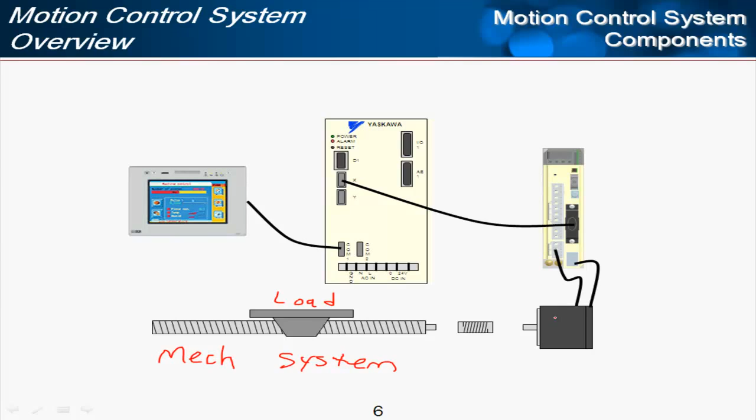So first, let's look at the components of a motion control system. The most important component in many aspects is the load, which could be a ball screw, a belt, or any type of mechanical system. But the load can't move by itself. We have to have a motor, a servo motor in many cases. But the servo motor also can't move by itself. It has to be driven through a drive.

This servo drive is often referred to as the amplifier, or amp. Yaskawa has a name that we put on the front of ours called servo pack. So these terms are all synonymous in the motion world. You'll often hear the word servo, and it can refer to the motor and drive, sometimes together, sometimes separate.

One common mistake is to call this drive the controller. In a sense it is controlling the motor, but the controller, or the logical controller, the PLC, is a separate system. The drive just takes a command and makes the motor move as commanded. The controller is what makes the decisions and decides what that command should be.

Over the years, different manufacturers have done things to combine the controller and drive into one package, or to combine the drive and motor into one package. Yaskawa has done this with the MP2600 IEC, which puts the controller together in one package with the drive. But really, no matter how you look at it, we still have these distinct components, whether they're in the same package or not.

Finally, here's the user interface, the HMI, the human machine interface. That could be a nice panel like this, or it could simply be switches and indicator lamps. This HMI is used to access and perhaps change different parameters in the controller, so that the controller can change the way it commands motion to the drive and hence to the load.

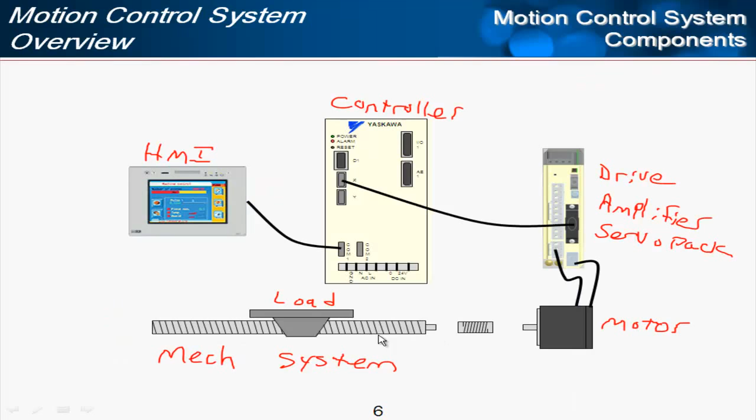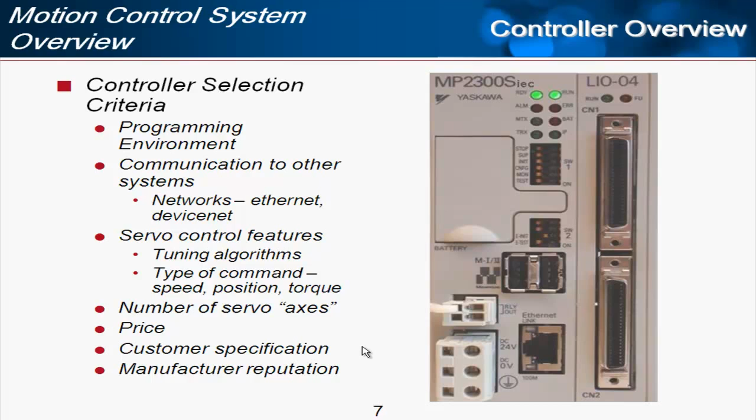Controllers also dictate the number of servo axes, where drive, motor, and load together are considered to be an axis. And of course, price is important. Customer specification sometimes just dictates which controller will be used, along with manufacturer reputation and other non-technical criteria.

Some of the controllers that Yaskawa offers are the MP2000 IEC family. We have the MP2300 SIEC, the MP2310 IEC, which has a little more built-in I/O capacity, and the MP2600 IEC, which is the one I was mentioning that's part of the amplifier all in one package.

There's also the MP2000 family, which uses a different programming platform and a different operating system, but is also very powerful and capable of a very high axis count. In the case of the MP2200, up to 256 servo motors can be controlled by this controller. Yaskawa also makes Sigma 5 amplifiers that are compatible with third-party vendors such as Galil, Delta Tau, Omron, and others.

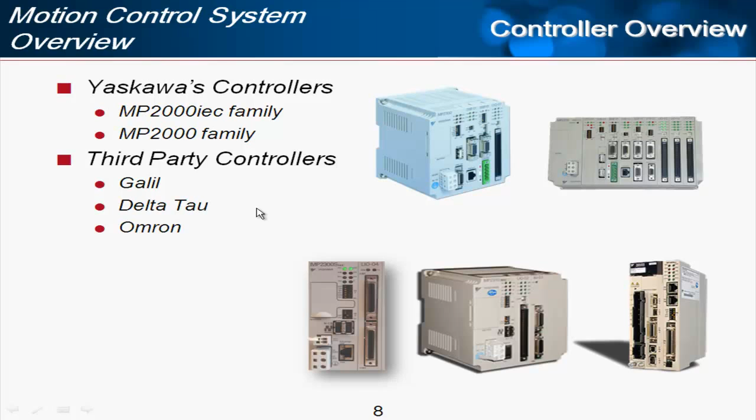Whether it's network amplifiers or analog pulse amplifiers like we're showing here, the Sigma 5 can interface with just about any type of host controller, including motion controllers, CNCs, indexers, PLCs, you name it. We've got an amplifier that will interface with that controller.

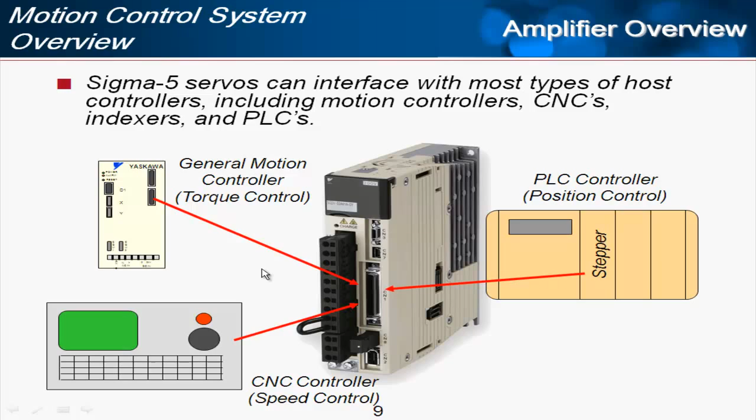Here we're showing an example of a controller in torque control mode. CNC controllers are many and varied, but in general they send a speed command, so we call that speed control. The most simple type of controller is often found in PLCs, where they'll just send a position command to the controller. This is very similar to a stepper motor, or as shown here, a stepper card commanding a servo. So with all these controllers—torque, position, speed—we can always do positioning as a system. The question, the difference, is just what type of command is being sent between controller and amplifier.

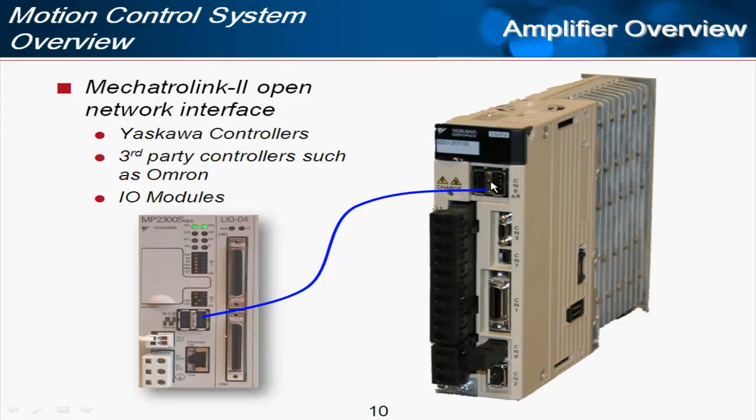A separate type of Sigma 5 amplifier is the Mechatrolink 2. That's an open network interface, and Yaskawa uses that with our IEC and MP2000 series controllers. Other third-party controllers, such as Omron, also make controllers to run servos using this network. This Mechatrolink network can also support I/O modules, an example of those being the Phoenix bus coupler, so you can use any of the Phoenix I/O on the Mechatrolink network as well.

Let's look next at the motor technology. Yaskawa offers 3 types of motor technology: rotary, linear motors, and direct drive motors. Rotary is the typical servo motor—when you think of a servo motor, I think of this rotary type.

Linear motors include 2 types. One is the pre-built, pre-engineered SigmaTrac, where you just take the whole thing, order it to length, plug in the cables, and it runs. But we also sell component level linear motors—3 types: coreless, flat iron core, and T-type iron core, where you've got the magnet track sold in lengths and then the moving coil. You'd build up the system custom, or perhaps even mount it straight to the machine.

The third type of motor technology offered at Yaskawa is called direct drive, and it's especially designed with mounting holes to mount a rotary table. So you can have a very large diameter rotary table on one of these small motors. The motors don't go very fast—just about 500 RPM is the fastest one, 300 to 500 RPM is about as fast as they go—but they really have high torque and high inertia, so they're very good for rotary table applications. They have a very high resolution encoder, so those work out really well, and you don't have to have any additional gearboxes or other mechanical components as you would if you used the typical rotary motor.

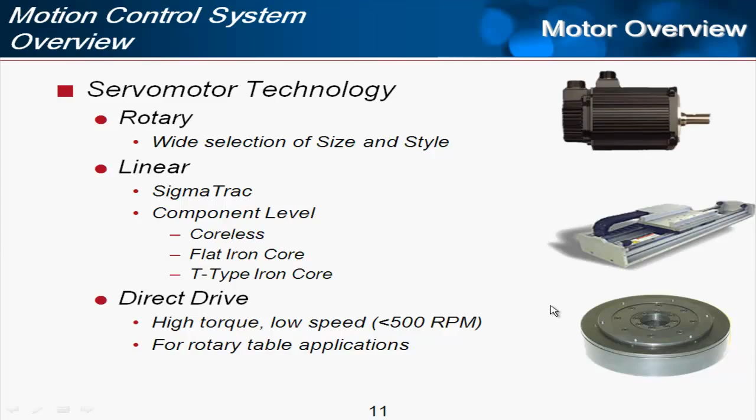Of all the motor technologies out there, why a servo motor? Why not an AC induction motor, or a simple universal motor like you have in a power tool? Well, servo motors are the most powerful for their size—you get the most torque and speed out of a servo motor compared to other technologies.

Servo motors also have very fast response. If you try to turn the shaft of a motor that's well tuned, a servo motor, it's going to respond and hold that position very tightly. Also, when you make it move, it stops, starts, and changes speed very quickly—we're talking milliseconds of change time, not seconds. This really lends itself well to the motion industry, where we're trying to do motion repeatedly and shave off a few milliseconds here, a few milliseconds there, to get the most output possible.

With a servo motor, you always have to have an encoder on the back, and that means you always need the amplifier. You don't run servo motors off line power at constant speed—you need the servo drive. Because of this, you always have a higher cost, especially compared to an induction motor with a VFD system. The amplifiers don't really cost any more for servo versus VFDs, but the motor is definitely more expensive. So you get what you pay for: millisecond response and a very small package.

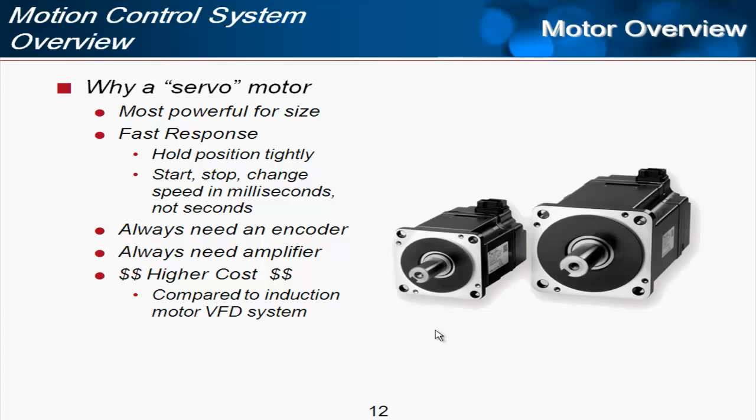Different options are available on many of the servo motors offered by Yaskawa. First of all is the voltage.

For Sigma 5 we have either the 200 volt motor or 400 volt motor. That doesn't mean you can't run on 100 volts, it's just that the motor will run on 200 volts, and there are 100 volt amplifiers that run the 200 volt motors.

Another option is holding brakes, which adds a piece to the end of the motor and allows it to hold its position even when the servo's off and you don't have any power. Especially good for vertical loads where the load could fall if nothing is holding the shaft.

A motor seal is a shaft seal so that chips, pieces of material, cutting fluid, etc. have no chance of getting into the motor from the shaft side. The motor is very well sealed from the outside, but the shaft is an entry point unless you have the additional seal installed. That's something you'd have to have installed at the factory.

The absolute encoder is our standard option now with Sigma 5. It means you don't have to home more than one time per install. Once you've homed the motor and have that position, that gets communicated up to the controller, and the controller always knows where the motor is. Even if the power is off, the battery to the encoder is never off, and the encoder will effectively stay on at all times, so you'll always know if the shaft has moved, even with the machine power off.

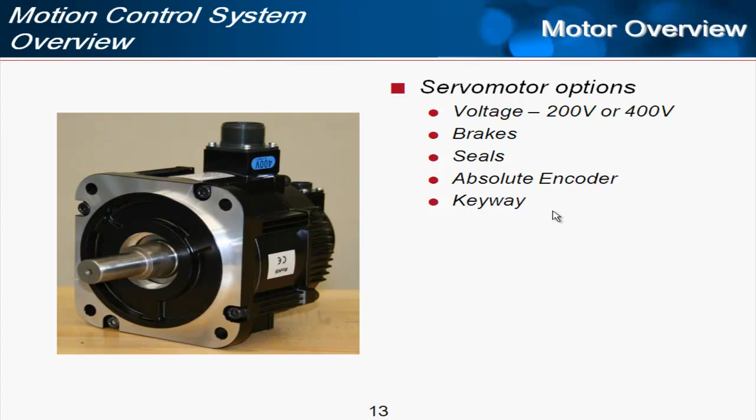The keyway is on the shaft itself. It's a little notch cut out of the shaft, and when you install the servo motor and couple it to the machine, there's a mating keyway, which does a lot to ensure the shaft cannot slip relative to the load. So keyway is an option, and if you don't need it, most of the time you can have a shaft with a keyway anyway—it doesn't matter if you're using a compression type coupling.

There are many performance specifications related to the servo motor, and I'll list just a few as an overview. The first is torque, or in the case of a linear motor, force—that's how hard the shaft can turn. More torque means more foot-pounds. Think of a wrench: the amount of torque you can apply to a nut depends on how long the wrench is and how strong you are. By the same token, a servo motor has torque, a measure of how hard that shaft can turn. In the case of a linear motor, that's just a straight linear force.

When you think of a motor, you think of it turning, and that speed is measured in RPM, revolutions per minute, of the shaft. To get a ballpark idea, Sigma 5 motors can go as fast as 6,000 RPM. The G series has more torque but less speed, maxing out at around 3,000 RPM.

A third very important specification for servo motors is the moment of inertia, typically referred to by the letter J for inertia and M for motor. Moment of inertia is a measure of how difficult it is to accelerate the motor from a stop, due to its mass and dimensions. The general trend is: the greater the radius of the rotor—the spinning part—the greater the inertia will be, and the heavier that spinning part is, the greater the inertia. The equations of dynamics and physics are used to determine the moment of inertia of the rotor.

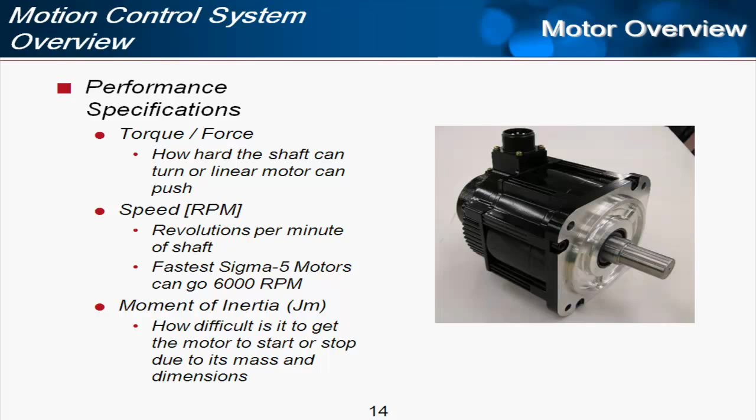The moment of inertia is a very key measurement in the sizing of servos. We like to look at the comparison of the load's moment of inertia and the motor's moment of inertia, and try to keep that within a certain range for certain demanding types of applications. This concludes the motion control system overview.